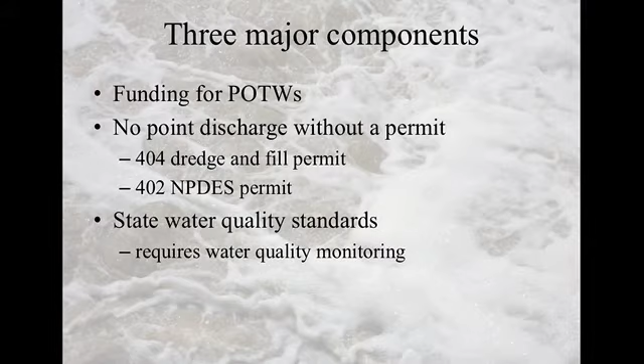And the other part of this is the state water quality standards and the required water quality monitoring. And so today we're going to try and knit all of these different things together to show you how it all plays out. This parallels the Clean Air Act in a lot of ways, so as we go through, you should see some similarities to that.

So there are three broad categories of pollutants. There's toxic pollutants, 126 chemicals that were specified in the Clean Water Act itself. The EPA can add additional pollutants through a rulemaking if they decide to regulate additional toxic pollutants. There's conventional pollutants. These are kind of like the criteria pollutants that we see under the Clean Air Act. Most water bodies have one or two or three or all of these pollutants in some amount. So they're fairly common, not something that you would be surprised to find in any given waterway, and they come from a whole bunch of different sources.

So those are the conventional pollutants, and then there's additional non-conventional pollutants that show up in way fewer streams, right? So these aren't nearly as common. Things like ammonia, different colors, rivers that turn orange with iron in them, the rusting iron color you'll see sometimes. All those are non-conventional pollutants, not things we see terribly often.

So again, the key part here is that discharge of any pollutant by any person is unlawful except in compliance with the act. Indirect dischargers, those again are the ones that discharge to a publicly owned treatment work. So basically anything that doesn't discharge directly to the water, to a river or a stream or a lake, is an indirect discharger. And they get special pre-treatment or secondary requirements. Those can be national or can be established by the local sewage authority. They don't need an NPDES permit.

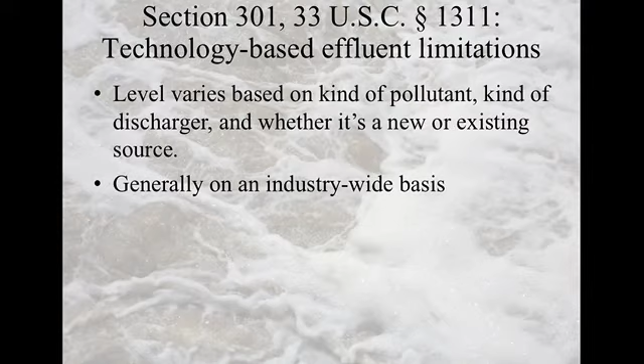Is it a direct, an indirect, publicly owned treatment work? And is it a new source or an existing source? Not whether the area is in compliance or not - we get to that through a different route in the Clean Water Act. And like most of the Clean Air Act standards, these are calculated, determined on an industry-wide basis, not by looking at the specific facility.

So for existing sources, we see the same kind of new source bias here that we see in the Clean Air Act - new sources are regulated much more stringently than existing sources. Starting with existing sources: existing toxic and existing non-conventional sources, that goes back to that first listing we had of different kinds of pollutants. So for toxics or non-conventional pollutants, dischargers have to use the best available technology that's economically achievable - kind of a mouthful, abbreviated as BAT. Existing conventional dischargers use the best conventional pollutant control technology, BCT. And existing publicly owned treatment works use secondary treatment, and we'll talk about what secondary treatment is in a second.

Yeah? So only in the first one do you consider the economic positions? No, unfortunately not. That's the only one that has it in the name, but you still include it when you're looking at this one too.

All right, so BAT standards. This is the performance associated with the best control and treatment measures that have been or are capable of being achieved. It doesn't have to be that exact control technology. It just has to achieve the same degree of control and treatment that the best available technology has achieved.

EPA has to consider the cost of attainability here. You're not doing a cost and benefit analysis, but you still have to consider the cost. Is this something that's going to put any treatment facility out of business because it's so expensive? So that's part of whether or not it's achievable.

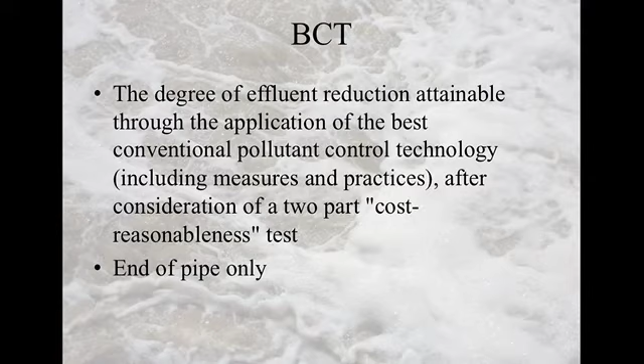Good enough? Okay. So the publicly owned treatment works, treatment levels. The primary treatment is when the solids just settle out.

How many of you have been to a sewage treatment plant? Look at that, that's pretty good. All right. Yeah, it's a pretty special place. It all comes out in the end.

So primary treatment, simple settling out of the solids contained in the sewage. A lot of times they'll treat it with something that knocks a lot of those contaminants, the solids, out of the sewage. Secondary treatment is what's required for existing publicly owned treatment works, and that gets rid of really the worst stuff.

You can get tertiary treatment. This is the kind of best standard you ever see in these things. Full-blown chemical treatment of sewage to bring water quality back to clean levels.

And then there are screens there that will pick up the big chunks of stuff that's not biological in origin. So plastics, those little disposable flushable wipes that are supposed to disintegrate that don't really disintegrate, all get stuck all over. If you've been to those places, the people who work there will rail about how evil those are. The Hot Wheels cars, all of those things end up on the screen.

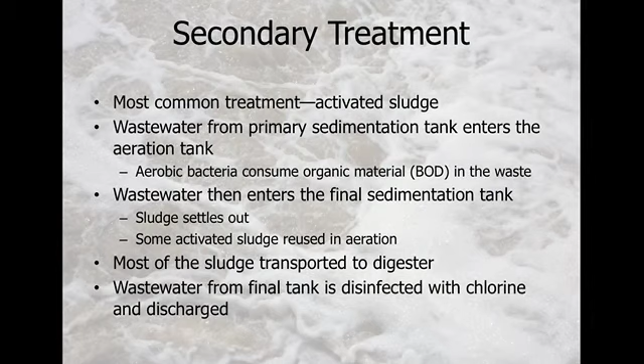So the primary treatment removes about 30% of biological oxygen demand, and secondary treatment will end up taking out about 90% of biological oxygen demand.

What is biological oxygen demand? It's a measure of how much organic material is in the water. This is one of the big ways we measure pollutants. If you end up with a lot of fertilizer or organic material in the water, that tends to produce algal blooms and encourages bacterial growth. When those bacteria die, when that algae dies, the breakdown of those critters takes oxygen out of the water. They're getting digested by other bacteria, and those bacteria use oxygen to do that, which can result in essentially water with no oxygen in it.

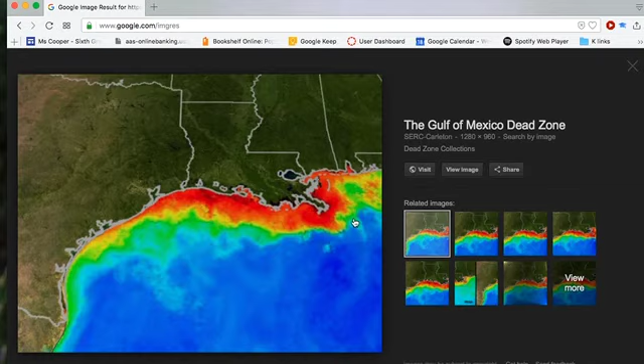The Mississippi River drains the whole Corn Belt — that's my home. All these states pour tons and tons of nitrogen and phosphorus fertilizer all over their fields, and that water comes down and is discharged out of the Mississippi River into the Gulf of Mexico.

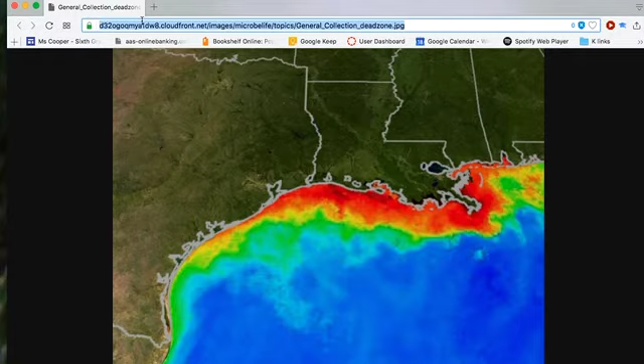We get some algal blooms, algae dying off, bacteria eating those dead algae, using the nutrients, reducing the oxygen levels, and we end up with a huge dead zone in the Gulf of Mexico where this nutrient-rich water is dumping in. Dead zone meaning there's no oxygen left, so the fish can't survive there, and the shrimp — I guess it's multiple species — can't survive there either. The size varies based on the year, but we're talking a big area, like the size of Rhode Island, essentially dead.

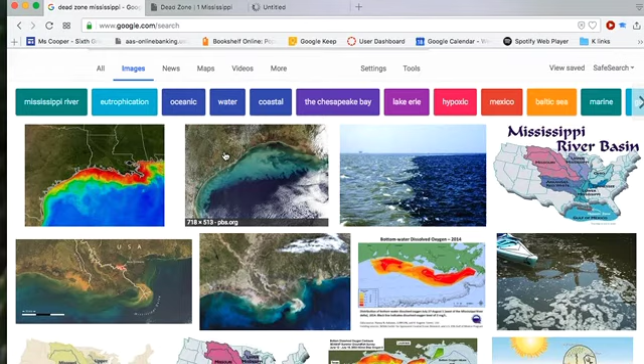Let's see if I can find a bigger image. The red there is the dead zone — yeah, you can see the algal blooms. Hypoxic means there's no air. So in 2014, about 5,000 square miles were impacted by that.

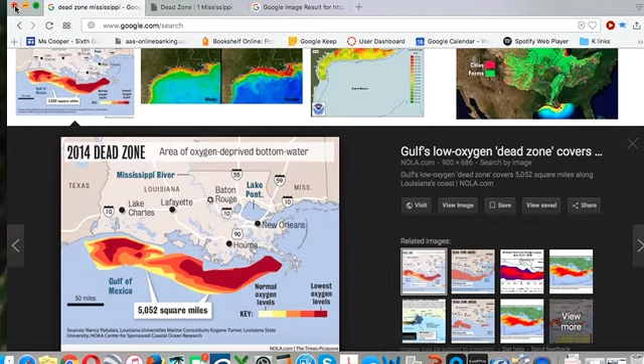Not a good spot to be a fish. And this is not uncommon — we see similar things in a lot of areas where these big rivers with a lot of nutrients discharge into the ocean. We measure those pollutants by measuring biological oxygen demand. You essentially take the water, put it in a bottle, and see how much oxygen gets used up over a five-day period after you collect that water.

Is that the same thing going on in Lake Erie, where it's all green and everybody's super concerned about it? Yeah, same idea. The great thing in those lakes is that all the zebra mussels are cleaning out all of the nutrients from the water, so — aside from pushing all the native species to extinction and all that stuff — they do at least reduce the biological oxygen demand.

If you look downstream of the publicly owned treatment works on a river — so here's our facility, primary and secondary treatment, and then it's discharging into the water — a lot of the biological oxygen demand has been removed, but there's still going to be enough nutrients coming in here. It's going to be organic matter, nitrogen — mostly nitrogen, though sometimes these are phosphorus limited — so organic matter, nitrogen, and phosphorus all get dumped into the water.

Biological oxygen demand is going to be high here, and then it'll drop as you move downstream in the river as it gets digested out. The amount of oxygen in the river will start high, drop quickly, and then recover — that's the low oxygen zone. The Mississippi River is so big, and there's so much in the way of nutrients going into it, that the biological oxygen demand just stays high until it finally gets out to the ocean where there's enough room for that kind of bloom to happen, and then we have that giant dead zone there.

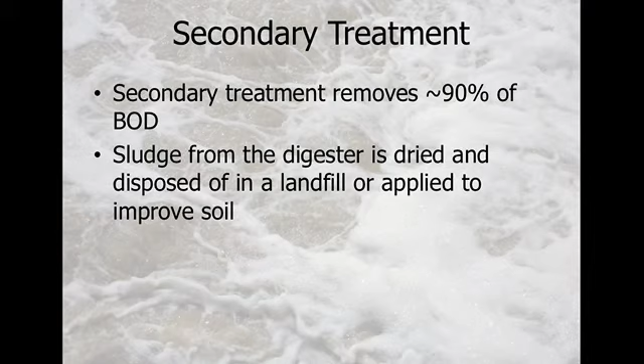All right, everybody good on that? Cool. So we have advanced wastewater treatment.

If you add more treatment steps — sand filters at the end — that'll take out a lot more of your organic matter. Carbon filters, chemical treatments, taking this water and putting it into a wetland where you can have high biological oxygen demand but in a controlled environment, where it happens fairly quickly. There are plants growing that take out a lot of the organic matter, and then cleaner water will leave the wetland area.

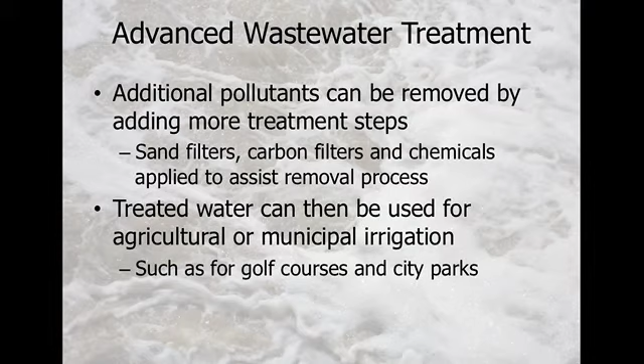So lots of different ways you can use it. You can use this treated water after advanced wastewater treatment for irrigation, for your municipal uses. You'll see golf courses that say watered with reclaimed water. Reclaimed is post-sewage water. It sounds much nicer when you say reclaimed water, though. A lot of roadside areas in California will say that. And you can continue treating it then, or send it back into your drinking water treatment, like you were asking about, in order to use that as a drinking water supply.

So we have these standards. You can get variances from the standards that we've talked about. Under section 301, to get extra time, there's essentially two major categories of variances. First is the economic hardship variance. If for some reason there's some special aspect of your facility that makes it really hard for you to use those treatments, the technology-based treatments that everybody's supposed to be using, you can get a variance that can soften the industry standard for your particular source and let you discharge dirtier water.

The other one is fundamentally different factors. When you apply, you have to tell the EPA there's something fundamentally different about the water that you have. It could be the age of your equipment, the age of the facility involved, the engineering aspects of the different control technologies that you have available to you, non-water quality environmental impacts. The administrator can then adjust your requirements as the administrator deems appropriate. So a lot of discretion there for the administrator to loosen the standards.

All right. So that covers our technology-based effluents. We're going to skip over water quality-based ones for now, and then we'll circle back to those. You also have to comply with, and again, this is what the Act requires for a discharge permit. Not all of these are going to apply in every category, right? If you're not a new source, the new source performance standards don't apply. If you're not discharging into the ocean, ocean discharge standards don't apply. But section 402 just gives us a laundry list that says you have to comply with all of these things. Easy enough, I guess, to comply with the ocean discharge criteria if you're not discharging into the ocean.

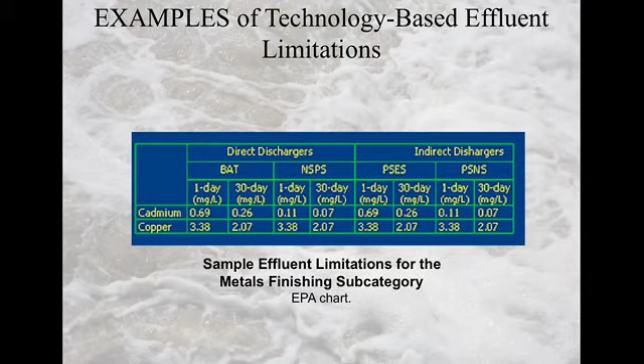And then there's also indirect dischargers, so these are the pre-treatment standards. And on these, they're actually the same as the direct dischargers because the publicly owned treatment works aren't going to be treating for copper or cadmium. They're not trying to remove those pollutants. So if you're an indirect discharger, you have to get your amounts down to the same levels because it's essentially going to be going straight into the environment. Okay. So those are our new source performance standards.

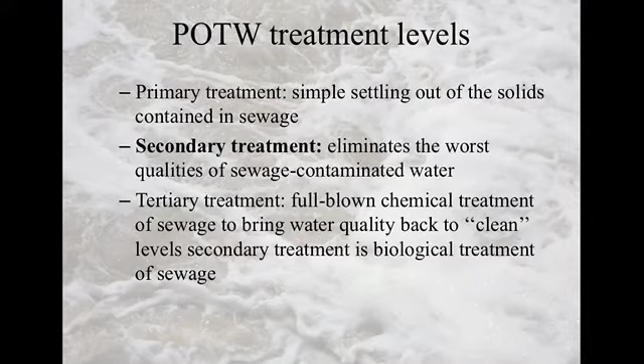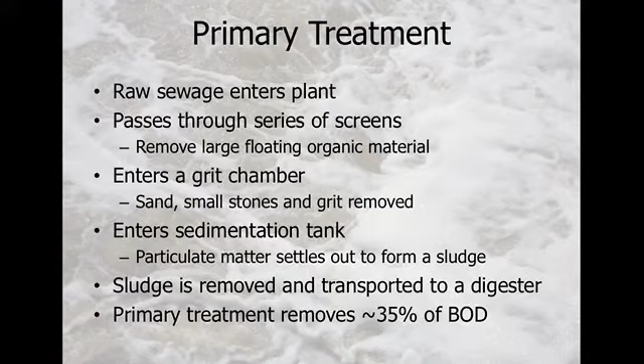Next, toxic effluent standards and pre-treatment requirements. You have to use the best available technology, or not. What does it stand for? BAT. There we go. Best available technology that's economically achievable. So best available technology economically achievable. I'm just going to say BAT because that's a lot easier.

All right, so for toxic effluent, you have to meet BAT, but the EPA can require additional tightening of the discharge allowances under Section 307, specific to these toxic effluents. The administrator can do them. The administrator does not have to do them. But if the administrator does decide to increase those standards under 307, they have to require an adequate margin of safety. That may mean they go all the way to zero. It may mean there's some things that we just don't want you to emit at all, and that you're just not going to be allowed to discharge.

And these standards do not consider costs and benefits. So the EPA isn't required to regulate these things, but if the EPA chooses to regulate them, they have to allow an adequate margin of safety. They need not consider costs and benefits, and they can tighten it up to the point you're not allowed to release these pollutants at all. All right, questions on those?

And then pre-treatment requirements for toxics. This is what we were discussing kind of at the beginning of class. EPA sets pre-treatment standards as necessary to protect the standard publicly owned treatment work from having any problems with it or from violating their own standards. If the publicly owned treatment work thinks it can handle those toxic pollutants because they use additional technology, because they use tertiary treatment, then they can drop those pre-treatment standards if they choose to.

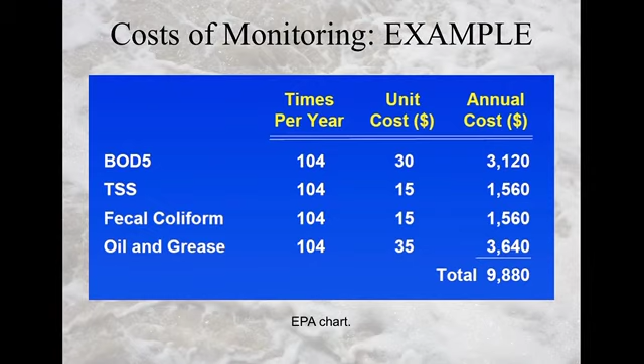These are real-world costs of monitoring a couple different pollutants: biological oxygen demand, total suspended solids, fecal coliform, which is essentially fecal bacteria, oil and grease, times per year you'd have to monitor, cost per monitoring, and then the total annual cost for those tests. So it's not tiny, but maybe not as bad as you might imagine. Of course, if you have a bigger facility, if you're monitoring for more things, costs can go up quite a bit.

So the way this works, the worry is that if these facilities are monitoring on their own, they might lie about it. They might just report what they want to report, make it look like they're meeting a permit even though they're not. They might not be monitoring as frequently as they should. They might not use the right tests. So these permits require daily or every other day monitoring reports, and those reports are public records. So we've got the public involvement here. The public gets to see that data as it comes in.

To make sure that data is good, the enforcing agency, either the state or the EPA or their contractor, can come in at any time without a warrant, without notice, to inspect these point sources, take samples, and essentially ground truth what's being reported to them already. That may be because they suspect this facility isn't doing what it's supposed to, it's had problems in the past, or concerned citizens will call in and say, hey, I think something's going on here.

And the other part of this is that, sure, discharge without a permit is not okay. Exceeding your permit, both of those result in a violation of your NPDES permit. But there's a lot of non-effluent permit violations on top of this. These are the paper violations that we discussed briefly.

If you don't submit your required monitoring reports, if you falsify the monitoring or other data, or if you don't meet the construction schedule deadlines for publicly owned treatment works, or if you're not monitoring the way that your permit says you're supposed to, then you face the same punishment that you would face for exceeding your permit. Okay, so you don't really have a reason not to report it because the punishment's going to be the same either way.

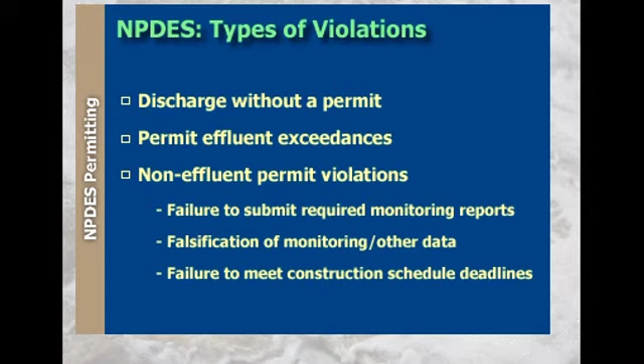And if you knowingly make false material statements, representations, or certifications as part of your reporting, or if you tamper with your device, those are criminal violations of the Clean Water Act. So big penalties, $10,000, imprisonment for not more than 2 years, or both for each instance. So that can add up fairly quickly. That's federal time. So we've got a system hopefully to get rid of that impetus to cheat or to misrepresent data on this reporting.

In terms of enforcing these permits, the state can enforce them directly, the EPA can enforce them, or citizens, under the citizen suit provision of the Clean Water Act, can enforce them. These are the ones we read about. The Clean Water Act was the act at issue in Laidlaw, which we'll have a presentation on next week, and also the act at issue in Gwaltney. So it has to be an ongoing violation, and you do have to send a 60-day notice letter of intent to sue before you file that suit.

All right. Section 404, or 403 rather, gives ocean discharge criteria.

These standards were promulgated in 1980 and haven't really been updated at all since then, so they're fairly old standards at this point. And actually, there's a lot of folks who do discharge directly into the ocean, especially here in California. We're too far in here in Sacramento, but someplace like San Francisco has a lot of dischargers that are discharging directly into the ocean there. Most cities that are on the coast will end up routing their discharge from their wastewater facilities directly out into the ocean and releasing their material out there.

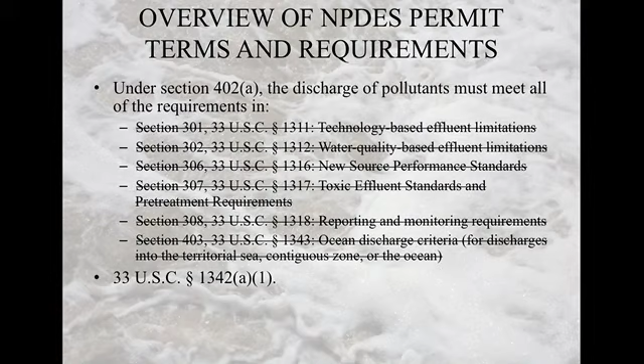All right, that hits all the things except the water quality based effluent limitations. And so we're gonna loop back to that now. Under section 302, we have water quality standards. So under the Clean Air Act, we have all these standards that will kick in areas that are out of attainment, right? Non-attainment areas have tougher standards that they have to meet. We have a similar thing, except we don't have nationwide standards under the Clean Water Act. Standards are all established by the states, and then there's a system if the states are not meeting the standards that they've established. There's ways to tighten up the permits on emitters within those particular water bodies.

So our primary approach are those NPDES-based, technology-based standards that we just talked about. But these water quality standards are essentially the backup to that. So if we're not achieving the water quality standards via technology-based permitting system, those permits will be tightened up even more beyond what the technology requirements would be. So beyond BAT, beyond BADT, beyond secondary treatment, any of those things, you can get even tighter than that for a given source if the water body to which that source is discharging isn't meeting the standards that it's supposed to meet under the state water quality standards. Everybody have kind of a rough feel for how the whole thing fits together? Okay, let's work through these and then we'll kind of pick it back up after that.

So the general approach to these water quality standards is that the state sets the standards and the EPA approves the standards that the state has picked. If the state doesn't set them, as we see for most of these things, the EPA will step in. So there's a series of steps that the state goes through. The first thing the state does is look at each water body within the state. This could be a lake, this can be a whole river, this can be a section of a river, this can be a stream that flows into a river. You can have a river that has different designated uses at different parts of that river. Okay, the state will break it up in different ways. But the state looks at a water body and decides what use that water body should support.

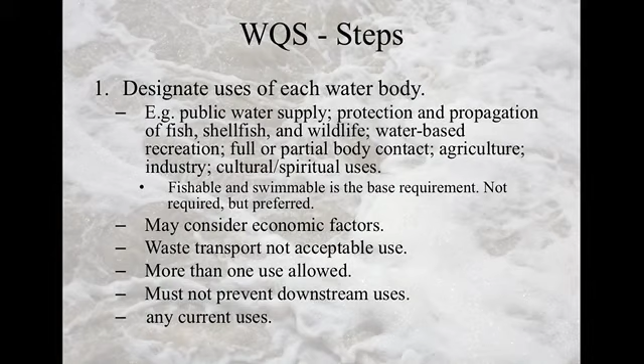All right, everybody good with that one? All right. Next step then is, based on that use, the state figures out how clean that water has to be in order to support that use. So what's the water quality standard associated with that designated use? EPA has developed a whole set of these that states can just pick up and use.

If you want the water to be fishable, swimmable, that means you have to have less than X amount of this particular pollutant. Right? The EPA designates all those things. States can go lower if they want, but they have to show a scientific rationale for it and have to provide the same degree of protection. Okay? So the easy thing to do is just take what the EPA does, but states may want to go lower than that for any number of reasons.

You don't consider the costs at this point, which makes sense, right? You've got the use that you've already designated when you're supposed to consider the economic impacts. But once you've decided what the use is going to be, figuring out scientifically what level of clean water is required to support that use, that's very clearly a scientific decision, not an economic decision. Make sense to everybody? Okay.

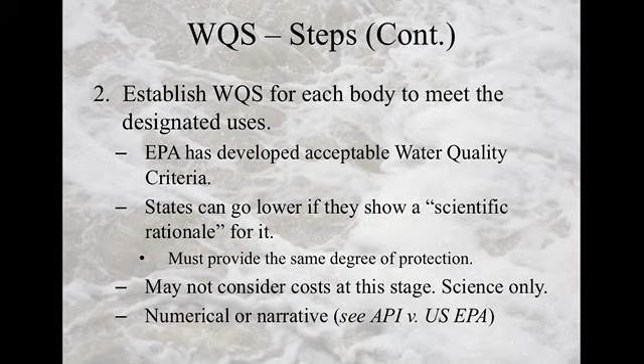These can be narrative. They don't have to be numerical. So it gets kind of circular when you say clean enough that fish don't die in it or something like that as your narrative description. The numerical descriptions are much cleaner. It's X milligrams per liter or per gallon or parts per million, something along those lines. But narrative values are okay, and you'll see that in some of the things that we'll look at today when we check out these water quality standards.

All right. So as I said, you can have one river system and designate different standards throughout the system, right? So think about our rivers out here in California. You may want to have the headwaters section, the parts of the river that are way upstream, cold water areas, support cold water fisheries, so trout and salmon spawning. That means really low sediment, really low nutrients, really low suspended solids. You can probably achieve that in these headwater areas.

But the salmon aren't going to spawn farther down in the river, and so as you move downriver from those areas, you get into the farming and agricultural areas, you may have more restricted uses of that water because you expect it to be dirtier at that point, and that's going to give you different water quality standards in that area. Does that make sense?

Okay. So as you move downstream, you're generally going to have worse and worse water quality, just naturally because you're putting more pollutants in. And so the state can decide to designate different uses for those different reaches. And if they do that, they'll have different water quality standards for each reach of the river.

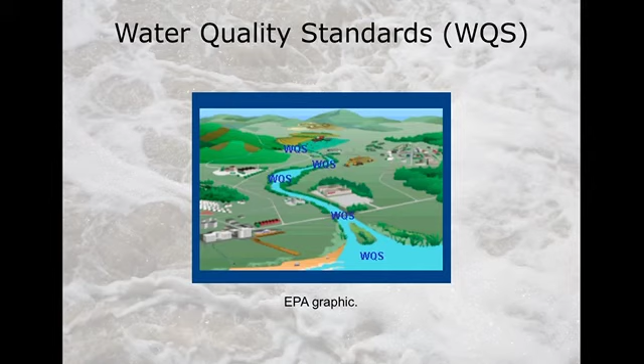All right. So after the water quality standards are set based on those uses, next step is what water bodies aren't meeting those standards. We call these water quality limited water bodies. And you come up with a whole list of those throughout the entire state. You put them on what's called the 303(d) list. And that 303(d) list is submitted to the EPA every 2 years by the state.

So the state goes out, it checks the water quality. It's supposed to look at all of its water bodies, but it doesn't happen, right? I've got another slide on that, but it's a really low percentage of the water bodies that actually get checked. But they're supposed to find out every 2 years what's not meeting the standards, ones that are believed to be threatened, ones that are likely to become impaired by the time the next list is out. So it's not just the ones that we know are violating it right now, but ones that may be violating it soon. There's about 42,000 listed water bodies nationwide.

It would definitely be higher if we listed everything, and not every state keeps up with this. 2 years to develop a report on the water quality for every single water in your state. Unless you're a state like Nevada that just doesn't have water, right? It's a hard thing to do. And Nevada doesn't have much money, so I guess it's a trade-off.

All right. For the water bodies that aren't on this list, just like you see under the Clean Air Act, there are anti-degradation requirements.

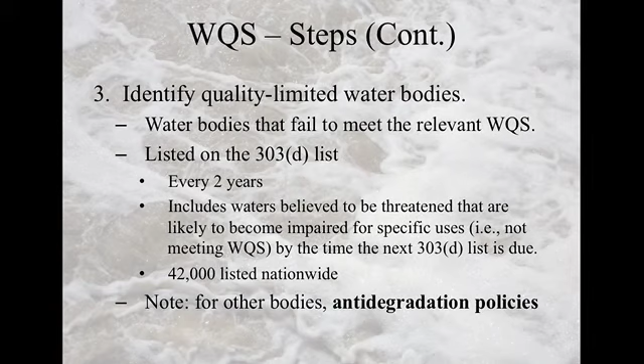We can't make these things dirtier than they already are, or not much dirtier. Just like we saw in the Clean Air Act, there's different tiers. Tier 3, special water, something like a national park, it's gonna be clean and we're not gonna let it degrade, we're gonna keep it really clean. Tier 2 is the next lowest level, and tier 1 is still above the water quality standards, but not as good as tier 2, the kind of standard water quality that we expect in most of the waters.

It's the same setup as under the Clean Air Act. There's a high level for national parks, special areas. There's a mid-level that everybody's supposed to meet, and then you can drop down to a tier 1, a lower level, if you justify why this particular water body needs to have a lower standard.

Yeah? I'm sorry, when did we use this? These are the anti-degradation policies. This is for water bodies that meet the standards, and it keeps them from getting worse. Just like in Tahoe, just like in attainment areas under the Clean Air Act, we want to keep those attainment areas from getting worse, so we have special programs to keep those areas clean.

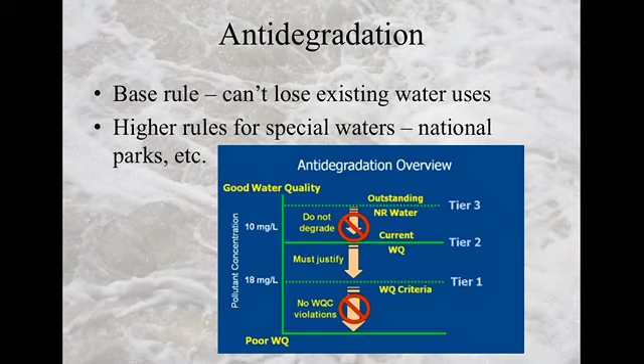The basic rule here is that you shouldn't lose existing water quality, or existing water uses. You can get dirtier as long as you stay above the standard for your existing water quality or water uses. All right, all good?

Getting back to the permits then, under section 301, the effluent limitations in the permits, which are set initially based on technology, can get ratcheted down in order to keep water in compliance or to bring water into compliance. So the state designates the use, from the use you get a water quality standard, you develop a list of the water bodies that don't meet that standard, and then for water bodies on that list, you can change the permits for all of the dischargers on that water body, in order to bring that water body into, essentially what we'd call attainment under the Clean Air Act, so that it achieves the uses the state designated in the first place. Everybody okay? Mostly fitting together?

The way we do that is by establishing a total maximum daily load, a TMDL. For each pollutant you're not in attainment for, you figure out basically what amount of that pollutant can come into the water body in order to still keep that water body within attainment, under the water quality standard.

So you look at a river and say, hey, we can put 8 tons of nitrogen into this river per day — because it's a daily load, it must be a big river to handle that. Let's say 1 ton of nitrogen that can come in; you look at all the sources of nitrogen on that river and break up that 1 ton among those sources, and everybody's gonna have to reduce their nitrogen emissions down to that amount in order to achieve the water quality standards on that river. Okay so far? Okay.

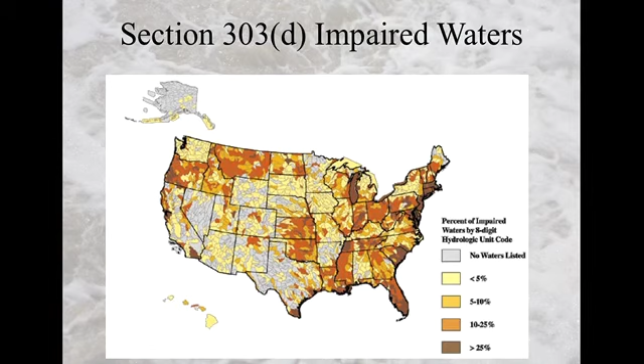All right, let's take a look at the California list. We've got a long website to type in this time, but you could probably Google it too. Find a water body near you, find out if it's impaired or not. Assuming it is, we're in California, so it probably is. Figure out what it's impaired by, what pollutant it is, what the sources of the pollutant are, and whether or not there's a TMDL for that water body. Once you get that, chat with somebody else about it a little bit.

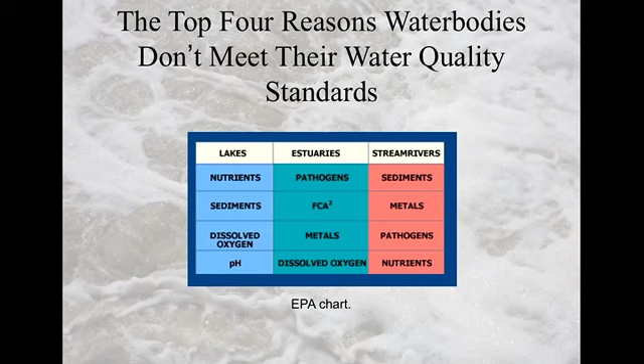So states can waive these water quality standards over parts of streams, small sections within a reach that has a water quality standard. And they can do this in 2 cases.

So this is a mixing zone, an area right next to a source, a discharger, and states can waive their water quality standards there. So maybe don't swim directly downstream of your publicly owned treatment work.

And during extreme flow conditions, usually extremely low flow events, states can waive their water quality standards. This goes back to the old adage, the solution to pollution is dilution. When there's not enough water in the river to dilute the pollutants you're putting in, the state can waive the water quality standards to allow undiluted pollutants to flow through the river.

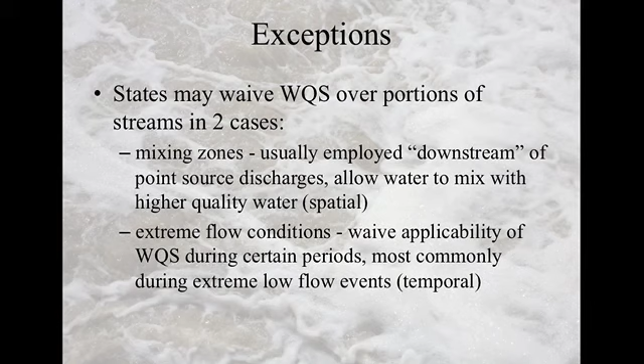Everybody understand that? All good? Okay, so when you're developing this TMDL, remember the TMDL is how you get from waters that don't meet water quality standards to tighter permit requirements. You get an allowable pollutant load.

So you look at this stream like we were talking about, flowing through, and you say we can allow in 1 ton per day of nitrogen. If we go more than that, the stream is going to exceed the water quality standards for the uses we've designated on that stream. Everybody good? That part makes sense?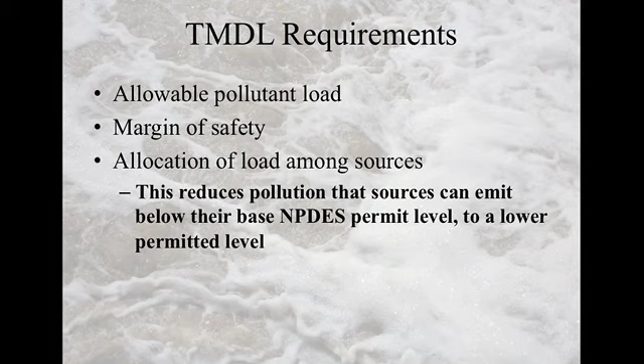And then you allocate that load among the different potential sources of pollutants. Those different sources are natural background sources and non-point sources, that's called the load allocation. And then the point sources, that's the waste load allocation. This generally tends to be litigation driven because states don't like to do it.

So we have some level of nitrogen that would exist in this watershed without people. That's our background amount, the natural background source, and that might be a third of a ton. So the river could handle 1 and a quarter ton of nitrogen. We take out a quarter ton for the margin of safety, and a third of a ton for background.

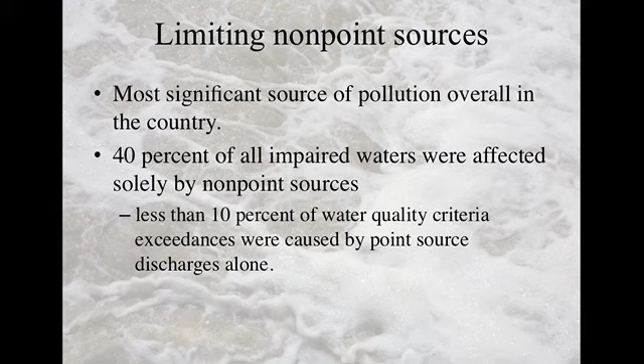And maybe you said this earlier and I just lost it, but do we have an idea of what the majority of these non-point sources are? Is it just individuals? So the major, I don't know if I have a picture. This is just, again, saying that same thing. So non-point sources, there we go. Ag is the single biggest one. It's farm fields, it's sediment. Forestry is a big one in California because when you cut down trees you get increased surface water runoff, increased sediment that comes along with that.

And an awful lot of the water bodies in California, Oregon, and Washington have designated use for steelhead spawning, salmon spawning, and trout spawning. And if you get sediment coming off of logging roads, coming off of logged areas, that keeps those areas from being usable by those fish. And so that's the big non-point source pollutant there. Urban runoff is a big one. Golf courses, all these lawns we have, beautiful manicured lawns with all the fertilizer that we dump on those.

I mean, the farmers at least have an incentive not to use too much fertilizer because it's expensive, right? They don't want to be putting extra stuff on beyond their kind of innate desire to protect the environment. They don't want to waste money on fertilizer that's just going to go away. But for a lot of us, my yard looks brown, I'm going to put some fertilizer on it, right?

Urban runoff becomes a pretty major issue in a lot of these areas. Golf courses, like I said, is another big one because we like to keep them so nice and pretty and green. But those are kind of your typical non-point source pollutants, or non-point sources. There we go. All right. Other questions on that? Yeah.

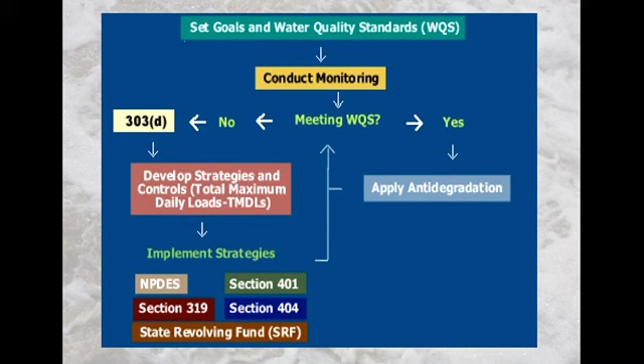Questions? What's the state revolving fund? Yeah, so it's another one of these grant kind of carrot programs. And there's a whole lot of them that we won't get into too much.

So judicial review, the citizen suit provisions of the Clean Water Act. Under 509(b), you can get judicial review for certain EPA actions: promulgation of national effluent limitations, issuance of NPDES permits, and approval of state permit programs. You can challenge any one of those under Section 509(b). Section 505 is your general citizen suit provision. You can sue anyone, right, any person for violation of their effluent limitation standards or any other permit conditions. Monitoring is the big one that people get nailed for there.

You can sue the EPA for failing to perform non-discretionary duties. Usually that's promulgating regulations or promulgating them wrong. If you think the EPA hasn't done it correctly, you can sue them over that. Unlike the Endangered Species Act, you can't sue the EPA to force them to go after violators. And that's the way most laws are, right? You can't sue the prosecutor for not prosecuting somebody, because we want that prosecutorial discretion.

So that's fairly normal. And then, as in most cases, you have to give a 60-day notice of intent before you file that lawsuit. If the feds or the states take action, you can intervene as a matter of right after you've sent that notice letter, but you aren't going to be the lead in the lawsuit. The feds get that. And generally, the review of the permits issued under the state delegation is going to be in state court, unless somehow you're raising a federal argument under the Clean Water Act. The review for those permits starts in state court and not in federal court. Okay, questions about our citizen suit provision and judicial review here?